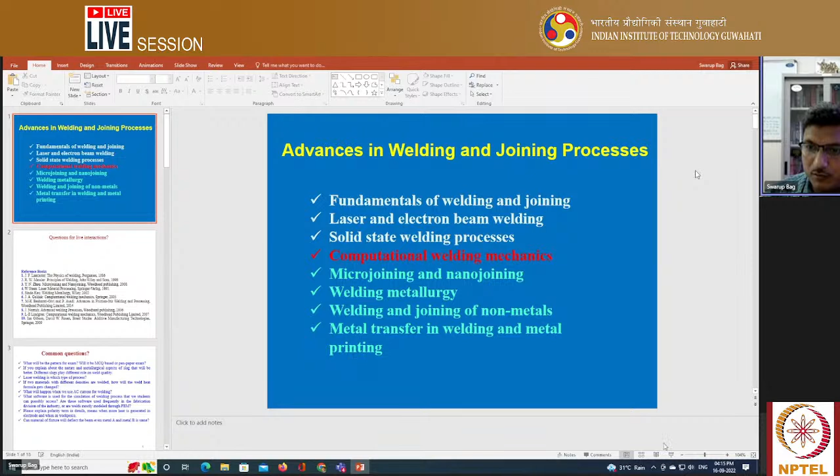I hope you have already gone through the few modules, for example fundamentals of welding and joining processes, then we discussed the laser and electron beam welding process, and after that the solid state welding process. All these different welding processes, conventional as well as advanced, we have tried to explain in my video lectures.

You have gone through some assignment problems and theoretical analysis associated with this course, but this live interaction is mainly meant for cases where you have any doubt or difficulty understanding while following these video lectures, so we can discuss all these aspects at this moment.

I think there is not much coverage done so far, but up to that point we have solved some assignment problems and you have gone through all the theoretical aspects associated with these courses. Maybe you can ask or raise your hand to discuss some particular points. But before that...

Some general questions normally arise, mostly from the student's perspective, that we'll try to discuss first, or I will give you an overall view of this particular course first. Then we'll interact with each other, and I'll try to answer your questions, whatever doubts you have related to this course.

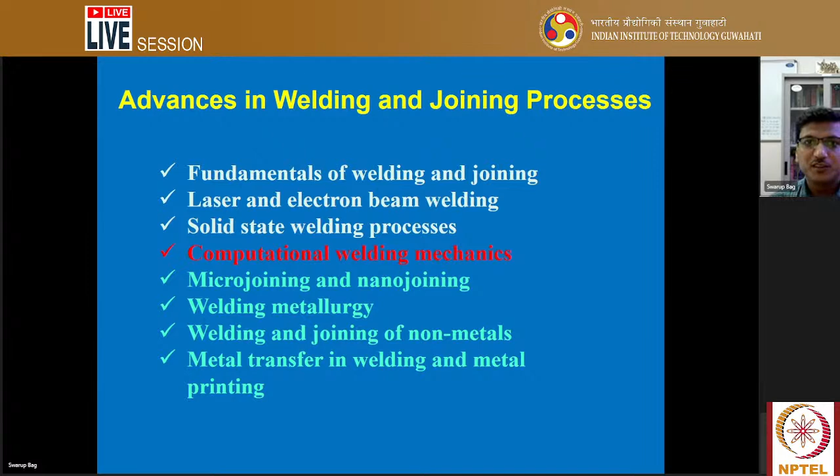Once we shared that Excel sheet to ask some queries beforehand, I didn't find any questions there. But anyway, you can ask directly these questions now itself.

Before that, if you look at the structure of the course, I mentioned several reference books also. So apart from the video lectures, if you go to the reference book, some clarification, understanding, or advanced study will help you resolve certain problems associated with the welding and joining processes.

For example, in this reference book, I mentioned different areas, actually the physics of welding is one particular area. What are the principles of welding - for that you can follow reference numbers 1 and 2. That is sufficient to understand the physics of the welding process.

Then, if you are very much interested in very small scale joining processes, you must go through this particular textbook on micro joining and nano joining. This is a very good book where you can find the different issues associated with very small scale welding processes of medical devices or any other kind of micro joining, or even nano joining processes.

Apart from this, if you are interested to understand laser welding processes specifically, this is the fourth book, a very good and interesting book associated with laser material processing or laser welding processes.

If you are interested in the metallurgical aspect of the welding process, welding metallurgy, reference book 5 is a very basic book, but at the same time very resourceful, associated with welding metallurgy. This book is also presented in a very simple way to understand all the topics related to welding processes.

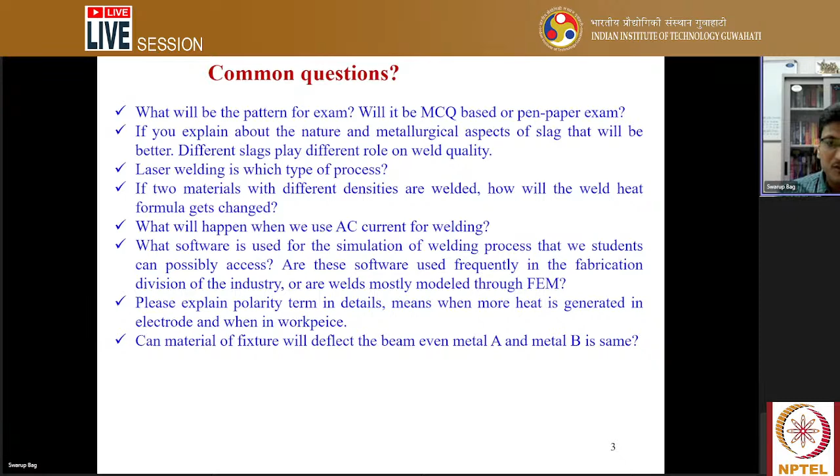Before that, a few things I'd like to mention about whatever chapter has been covered so far. Two significant parts I'm trying to mention in this particular live interaction. One is the physics of the arc welding process.

So in the physics of arc welding process, we understand that voltage and current are required. Voltage means the potential difference that causes the current to flow, and current is the movement of charged particles in a particular direction. In the welding process, the potential difference required is low, but current flow is much more.

Polarity means which part we connect to the workpiece terminal and which part we connect to the electrode terminal. Accordingly, we can decide the polarity. That means in direct current we can utilize electrode negative or electrode positive. These are the two polarities: DCEN and DCEP.

Apart from this, sometimes we can utilize AC current. I already mentioned that in case of aluminum, we can utilize AC current.

Now, heat generation in the electrode depending upon GTAW and GMAW are different, because heat generation in the electrode is minimized in case of the GTAW process, but maximized in case of the GMAW process. So in that case the polarity can be different. Even for DC current, the polarity will be different in GTAW and in GMAW. Let me explain all this matter.

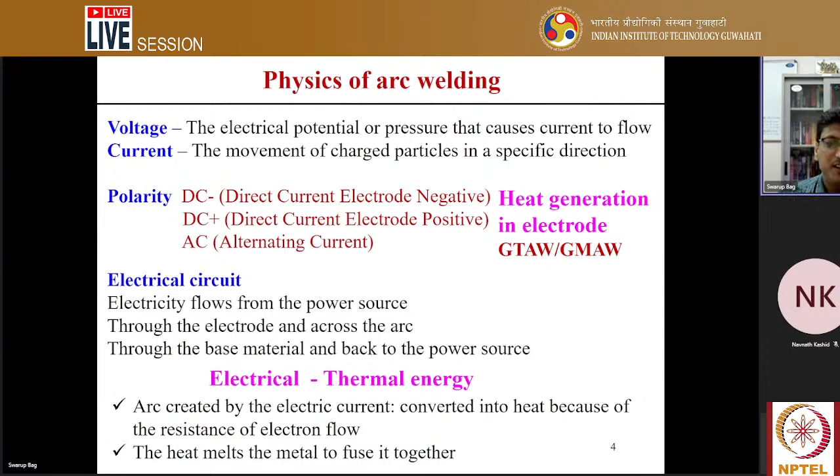Sometimes you face difficulty understanding the enthalpy of melting, because when the arc interacts with the substrate material, it melts a certain part that creates the fusion zone, molten zone, and heat affected zone. But how to estimate the amount of heat required to melt a particular volume, or to define the weld pool? The heat required to melt the weld pool volume is basically the heat required to melt the solid.

In the basic calculation, we try first to reach the melting point temperature, and at the melting point temperature there may be a phase change, meaning from solid to liquid phase. So both components of heat have to be added.

One is the specific heat associated with raising the temperature up to the melting point from room temperature, plus L, meaning the latent heat of fusion. Be careful with the unit in which the latent heat is given. So the first part is raising the temperature to the melting point, and the second part is adding the latent heat of fusion to account for the change of phase from solid to liquid phase.

And if you have the data or information available, if there is some superheat also, that can be counted too. But in that case we need to know the peak temperature. Using the specific heat of the liquid, you'll be able to find out the superheat required in this part to generate the weld pool volume.

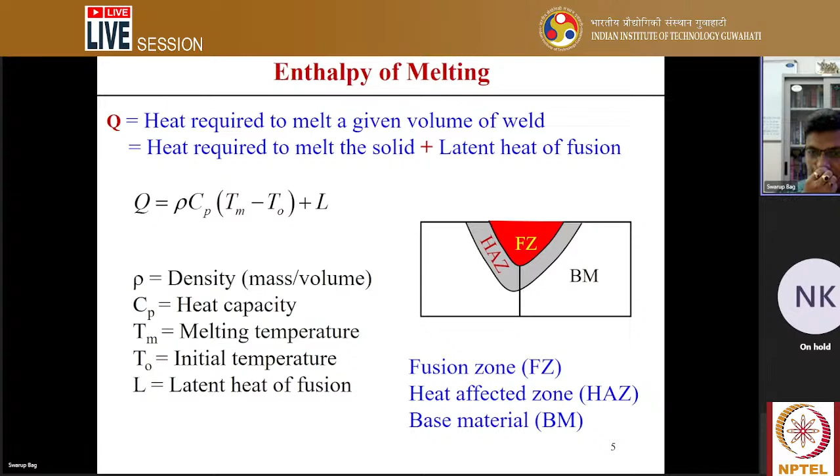Now, sometimes we confuse the surface active elements. We have already explained this, but if we look into fusion welding process, the presence of surface active elements in the molten pool actually modifies the molten material flow pattern. That directly impacts the fluid flow pattern, becoming the dominant driving force for the fluid flow.

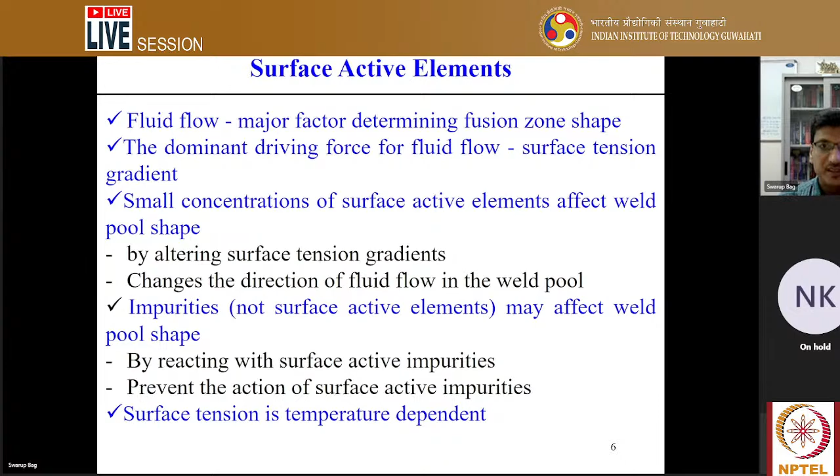In that case, we consider the surface tension force, and this surface tension force changes depending upon the presence of the surface active elements. Here you can see how the surface tension is changing, in the downward direction, what we call the negative slope, and the positive slope.

In these two cases, the pattern of the weld pool is completely different. One is the flat pattern, where the width is much more and depth is less, and in the other case the width is less but depth is much more. So the surface active elements change the surface tension force, and once there is a change in the surface tension force, it impacts the flow pattern within the small weld pool, and the flow pattern decides the particular schematic shape of the weld pool.

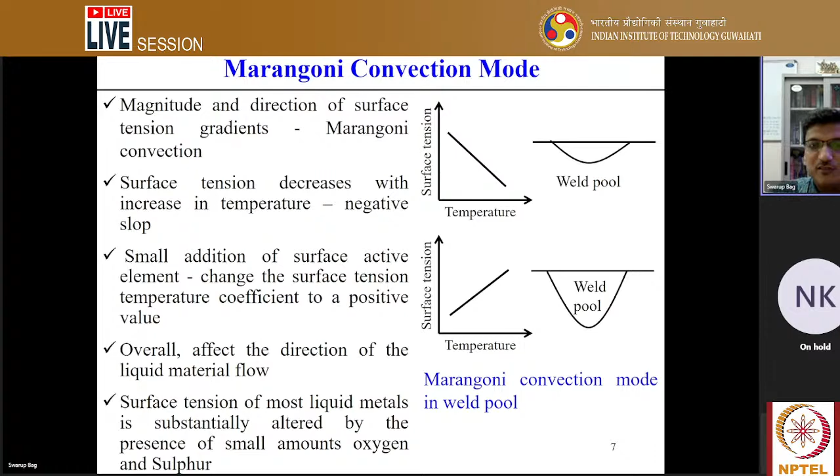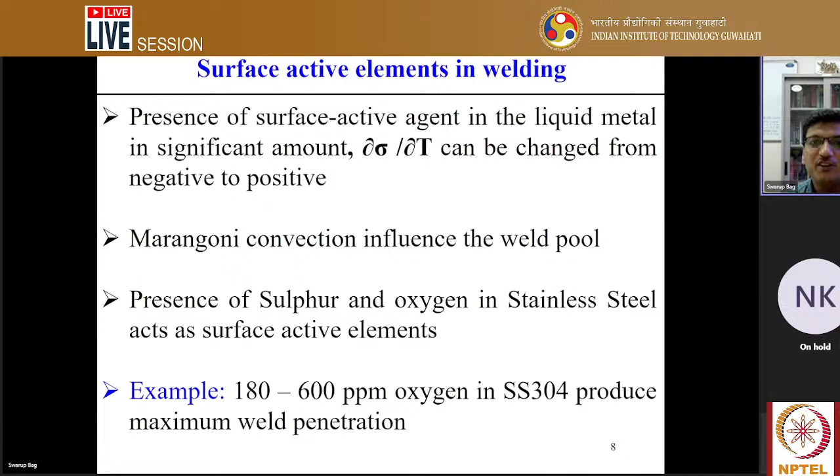Here you can see one example: 180 to 600 ppm oxygen in SS304 actually produces the maximum weld penetration. That means in that range, oxygen in SS304 acts as a surface active element, and its presence tries to maximize the depth of penetration and minimize the width. So we can take this as an advantage, using the presence of surface active elements to achieve full depth of penetration in welding processes, even for gas tungsten arc welding.

Let me explain how it is acting differently. The first case is pure iron. In pure iron, there is no presence of surface active elements. The flow pattern normally goes from the center point to the outward periphery, and surface tension acts from center to outward periphery. In that case, the width is much more and the depth is less.

But in a certain case, iron with a very small quantity of sulfur present in the steel, sulfur acts as a surface active element, and here the flow pattern is completely reversed because of the surface active element.

In that case, the material flow pattern is in the anti-clockwise direction, and the surface tension force acts from the outward periphery towards the center. That actually tries to enhance the depth of penetration and reduce the width.

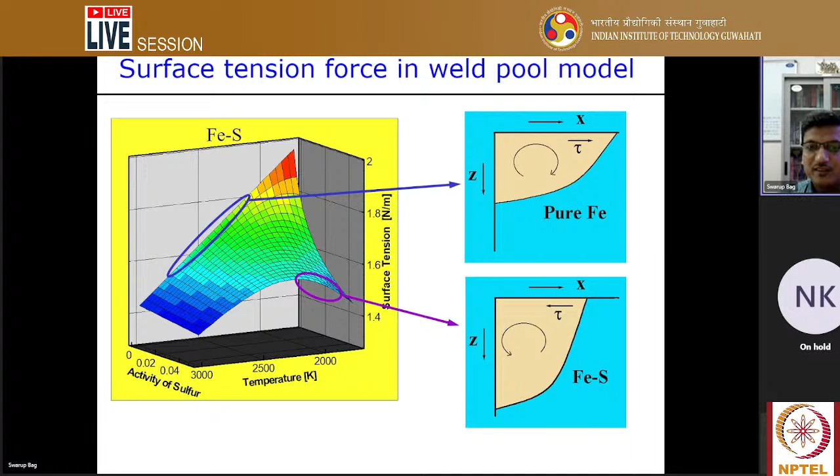So when you enhance the depth of penetration, we can achieve full depth of penetration, which is advantageous to get a good weld joint. So to achieve this high depth of penetration is even the significance of the surface active element.

So there are three different ways we can introduce the surface active elements. For example, through the surface chemical composition of the base material, meaning some quantity of the surface active element is already existing in the base material.

The second option is spreading fluxes, such as oxides, on the substrate material. You can simply spread titanium oxide or other kinds of oxide over the surface, and that acts as a surface active element when you do the welding process.

Or another way is active gaseous addition. For example, CO2 can be added with the shielding gas, and in that case the oxygen can act as a surface active element. So there are different ways to introduce surface active elements during the welding process.

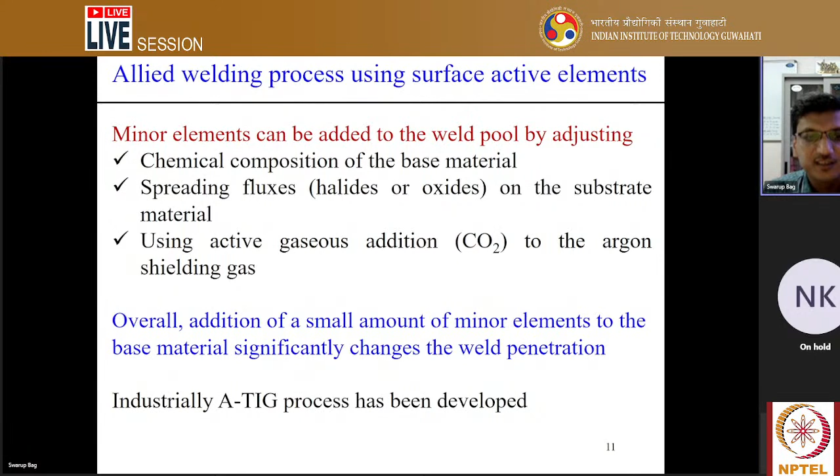Based on the concept of the effect of surface active elements, the industrially activated TIG welding process has been developed. It is some modification of the simple TIG welding process, tungsten inert gas welding process or GTAW, gas tungsten arc welding process. Taking the concept of surface active elements, this TIG process has been modified, and the industrially activated TIG welding process has been developed.

Another part we can see is the electron beam welding process of dissimilar materials. This is actually a very common problem when you try to join two different materials having different properties, as their magnetic properties are different.

In that case, we can face difficulties using the electron beam, because in electron beam welding we normally join components of very high thickness, which is not possible using conventional arc welding, or even there is a limitation with laser welding. In that case, we try to join the two components using the electron beam welding process.

With electron beam welding, we can reach a very high depth of penetration, so for very high thickness of material we can use this process. If the material is very costly, we can use it too, because electron beam welding occurs in a vacuum, so in that environment we can join these two components.

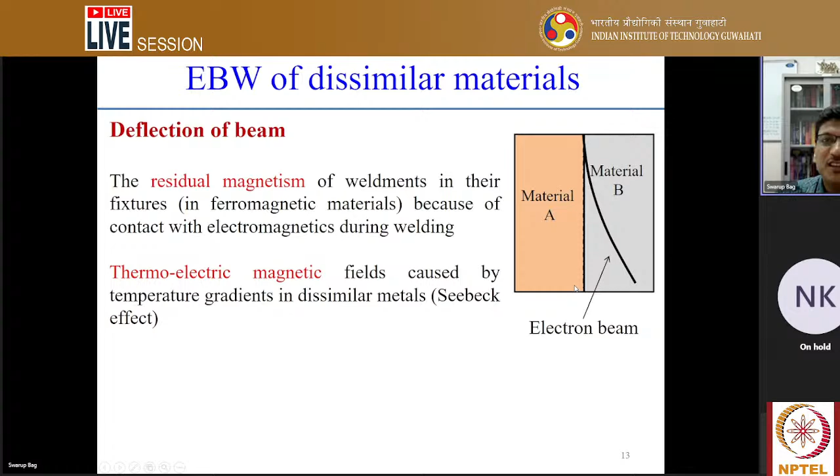But what happens when the two materials are different? Then residual magnetism is created, and there is also the presence of fixtures. In that case, the thermoelectric magnetic field will try to deflect the electron beam towards one type of material, because of the Seebeck effect. So the deflection of the beam can happen towards one particular material. This is the usual problem in dissimilar welding with the electron beam welding process.

We can find these difficulties in combinations of materials such as iron and copper, stainless steel and low carbon steel, and even low carbon steel and nickel-copper alloy. So in this combination of materials, we can find this issue.

According to the Seebeck effect, an electromotive force is generated due to the temperature gradient between two different materials. The Seebeck EMF can be calculated as minus S into del T, where S is the Seebeck coefficient and delta T is the temperature gradient. This generated EMF tries to deflect the beam in one particular direction.

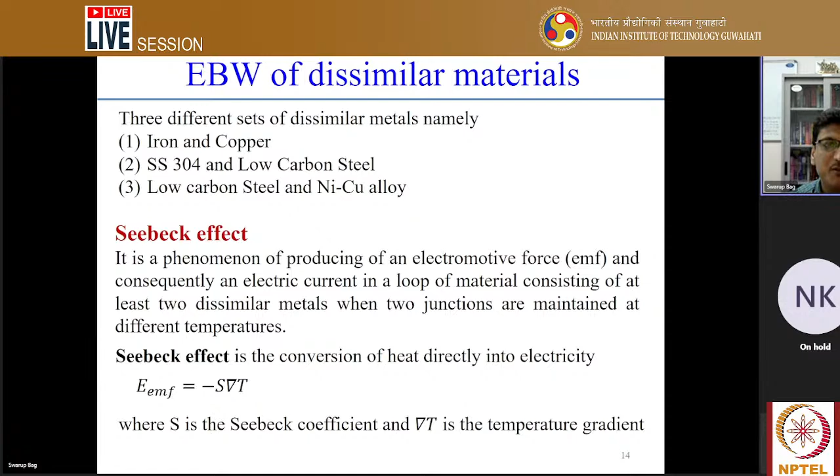Now we try to compare between laser and electron beam welding processes. Mostly, the electron beam welding process gives a very narrow weld zone and heat affected zone, and laser also, but not as narrow as compared to electron beam welding. Deep penetration can be achieved in electron beam welding.

Even laser welding can achieve deep penetration, but I have written lack penetration because, as compared to electron beam, the penetration depth can be less in laser welding.

Welding speed can be very high in electron beam welding, and laser welding is also very high as compared to arc welding, but it should be less than electron beam welding.

Regarding shielding gas, electron beam welding occurs under vacuum, so there is no question of contamination of the welded zone, and there is no requirement of any shielding gas. But in laser welding, we can utilize different shielding gases.

A vacuum chamber is required for electron beam welding, but not for laser welding. However, the cost is very high for electron beam welding units as compared to laser.

Generation of X-rays is possible in electron beam welding, but not in laser welding. However, power efficiency for electron beam is very high, 80 to 90%.

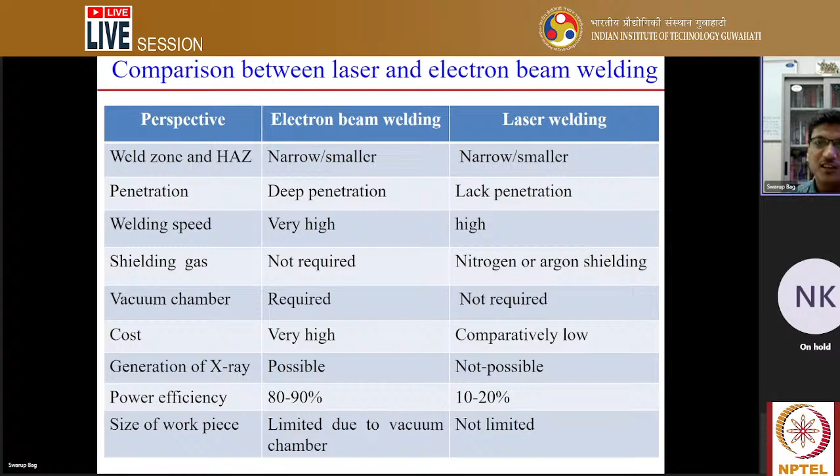So these are the very specific differences between the electron and laser beam welding process.

Now I'll show one slide on heat generation associated with the friction stir welding process, how you can calculate it. In friction stir welding, the tool shoulder and the tool pin are there, and there is frictional heat generation at the contact surface, the shoulder surface. You can find the total heat due to sliding friction and sticking friction, dividing it into these two parts, and find the elemental heat generation dqf for the elemental area.

You can define the relative motion between the tool and the workpiece using a contact state variable delta, which is a ratio that varies from 0 to 1. Accordingly, you can decide the sliding or sticking situation.

We apply different contact friction laws. In the sliding case, we apply Coulomb's friction law, the contact pressure into the coefficient of friction. But in sticking, the plasticized metal is exactly sticking with the tool, so you need to overcome the yield stress value, sigma y by root 3, called the shear yield strength. In that case, the contact shear stress equals the shear yield strength at the purely sticking condition.

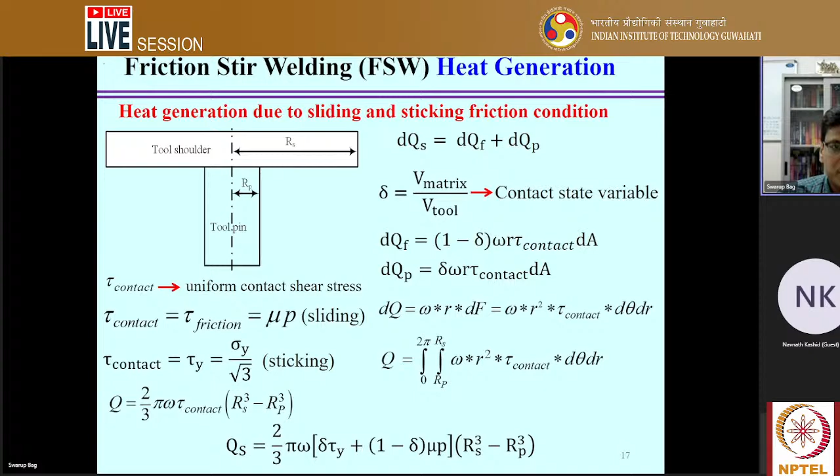Sometimes we can use diffusion bonding, one of the very old processes. Diffusion bonding means if you want to join two components, you keep them in contact, possibly applying force, and hold it for a long time, then diffusion occurs from one layer to another. But for diffusion to occur, surface preparation is very important. There should not be any contaminated layer for successful diffusion bonding, so you have to remove that layer with proper surface preparation.

Then keep the two components in contact and hold with sufficient pressure for a long time for diffusion to occur, though it's time consuming. We can find the relation between temperature and diffusion coefficient, which varies exponentially. Diffusion time also depends on diffusion length, the length up to which diffusion occurs, calculated in terms of dt to the power half. This is a very empirical relation associated with the diffusion bonding process.

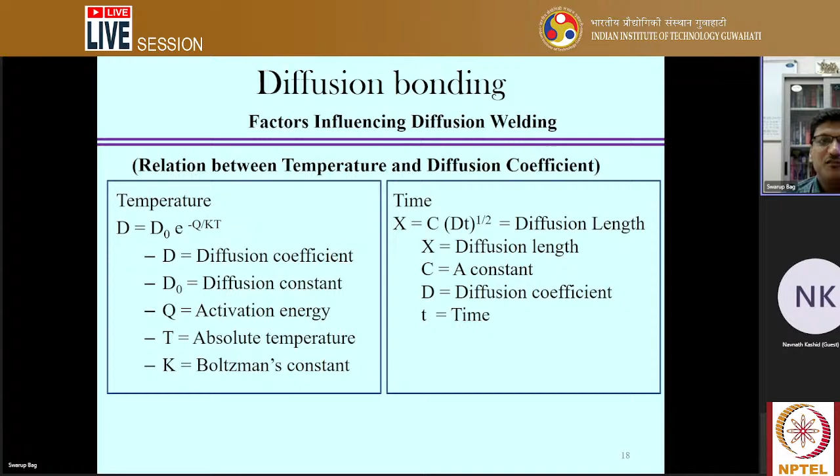I think that's all for this presentation. Now we'll try to discuss if we have any query, and look into all these aspects.

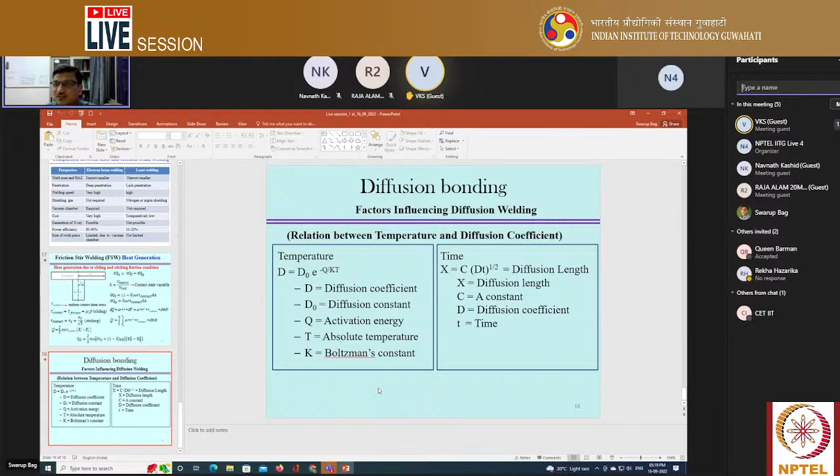Recoil pressure is not an input parameter. It is basically associated with creating a vapor domain, which we can also find in laser welding. When there is generation of a keyhole, recoil pressure comes into the picture. It represents the dynamic balance between the molten metal and the vapor, since a vapor domain is created.

Recoil pressure tries to keep the keyhole open. As the keyhole moves, it maintains a dynamic balance between the depth of penetration, the liquid domain, the solid-liquid domain, and the vapor domain, creating the dynamic pressure that keeps the keyhole opening.

The basic doubt is that vapor is very light in weight, density-wise, so vapor should always go out of the material, but instead it goes inside. That's why pressure is required to sustain it. The vapor domain has to be created and sustained in the keyhole, only by a very high pressure created to maintain the vapor domain up to the depth of penetration, up to the size of the keyhole.

So this pressure is being created by the molten pool, the molten electron beam pool. Yes, the pressure is within the molten pool, being created by the molten pool. Thank you, sir, this was the doubt.

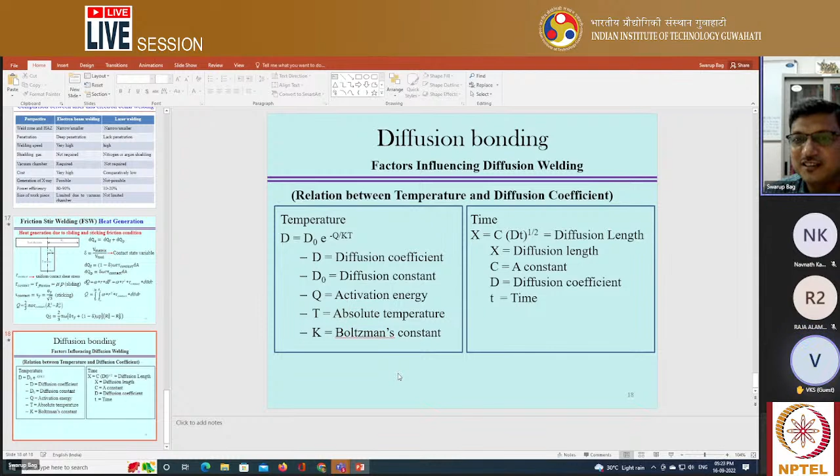So you can explain, we can directly interact. No problem, you can send me the details. Sure, sir, definitely I would like to talk to you. I have to look into it and see what is exactly happening. Sure, sir, please, I will keep on interacting.

I am basically at Raja Ramanna Center for Advanced Technology, Indore. I had spoken to you once by phone also. Thank you very much for your suggestions, I will keep on interacting. It was nice to talk to you. Bye.

Hello. Hello, Swarup sir.

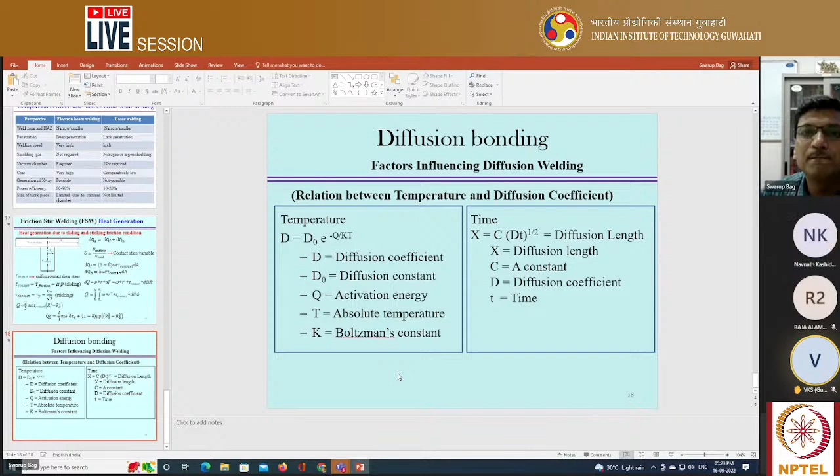Hello, so I think we have this. I'm about to leave now, please, I have another meeting actually from 5. We are supposed to go for an hour. Maybe if you interact through email or another way, you can interact, or maybe net, right? Okay sir, yeah, okay thank you, thank you very much for your time also to interact with me. Okay, thank you.